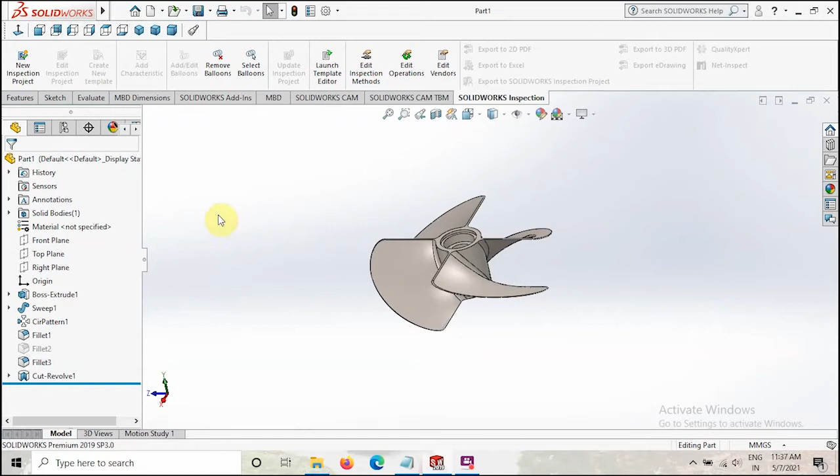I am closing this model now. We will start from fresh. Go to file, take new, take the part, and click OK. After that, go to front plane. We have to create our shaft first.

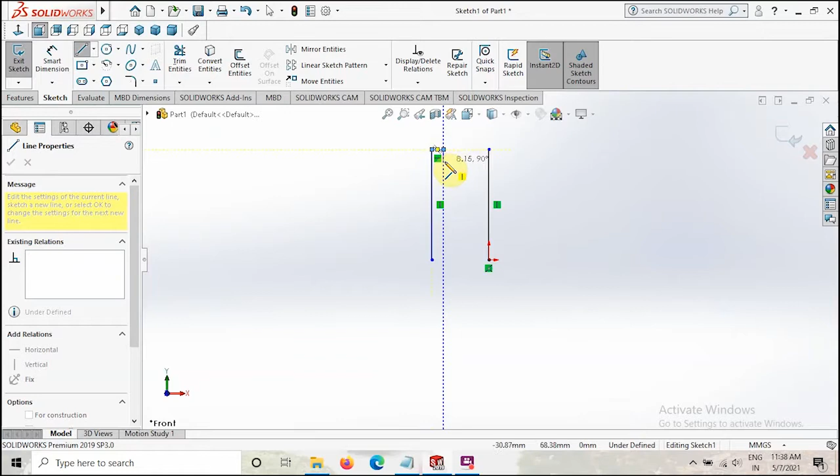Create one center line like this, and create one sketch from here to here. Then draw like what I am doing now: one horizontal line and one vertical line, one more horizontal line and one vertical line, horizontal line, and we'll drop it here.

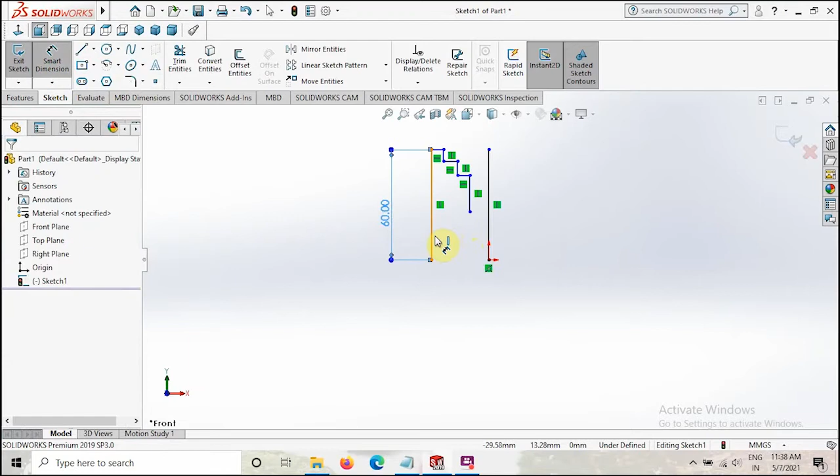Let's give this dimension 50 or 60. Then this dimension we can give 25. This dimension we can give 4. Height we can give 5 or 3.

Then this dimension give around 5, and this height give it around 12. This dimension 12 is given for the bearing sitting area - this place we can place our bearing. After that, give this dimension 3.

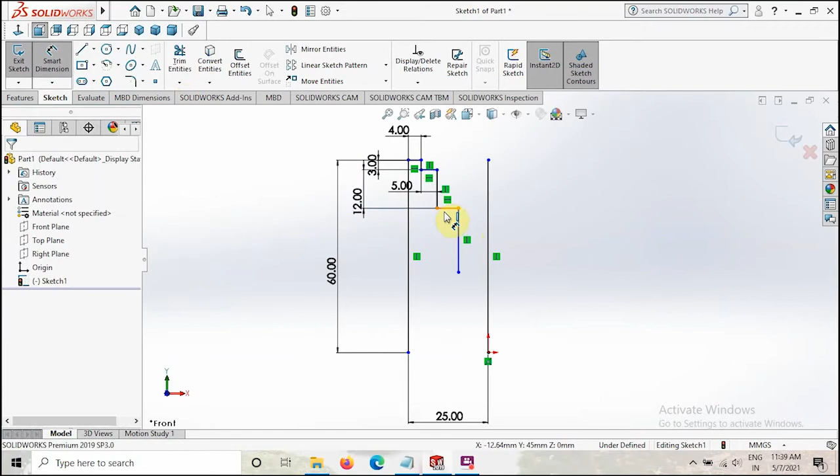We have to mirror this on this line. Just trim this extra line and go to the mirror option, select this sketch, and mirror on this line. After that, click OK.

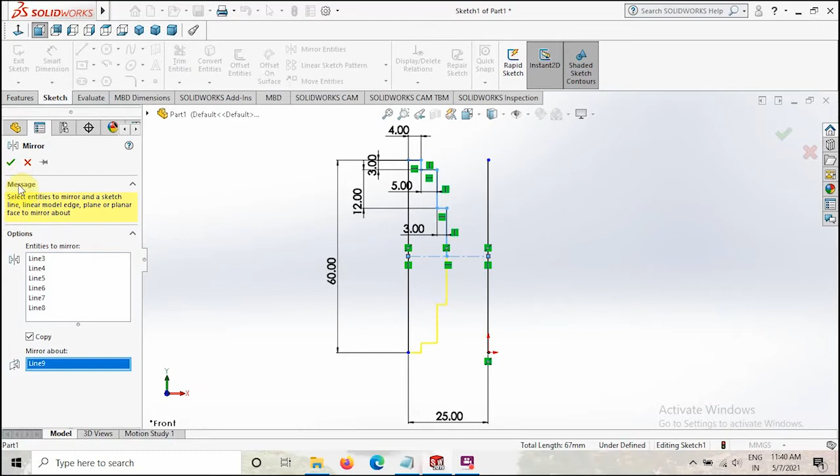Guys, these dimensions are just for modeling purpose. You guys can change it anytime. Whatever dimension you need, you can change it to that dimension. I am going with some assumptions - it's clearly up to you guys how you take it.

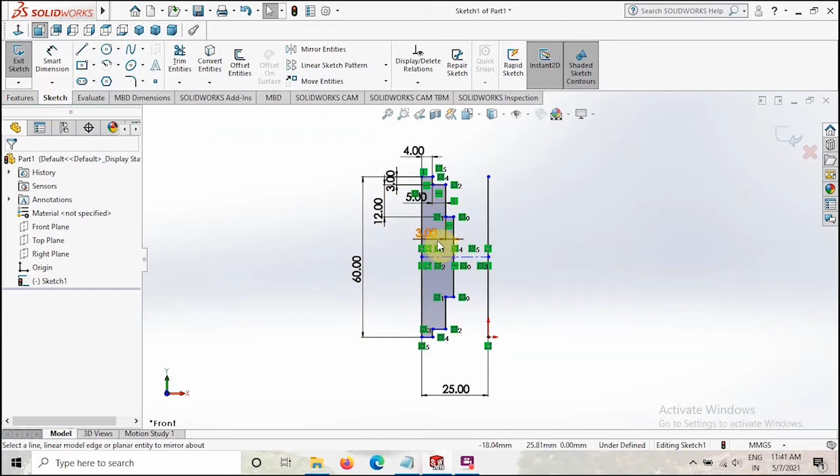After this sketch, just delete this center axis. Then make this center line for construction. Go to features, revolved boss/base, then select the sketch and select the center axis. It's already selected automatically, so no need to worry, just select OK.

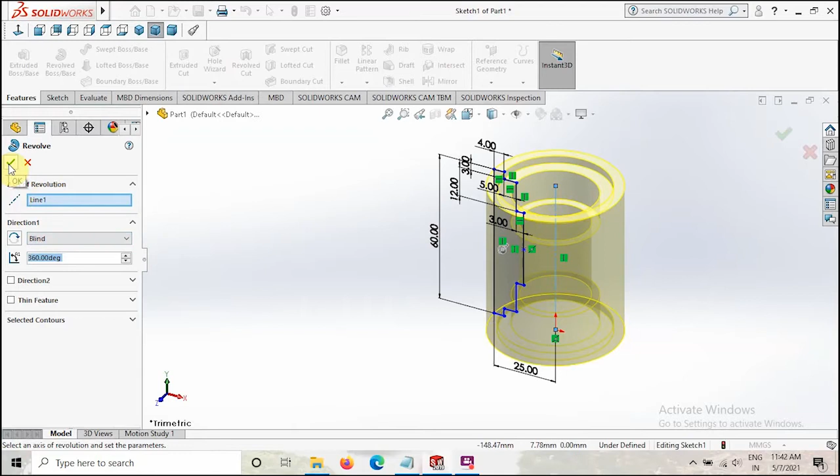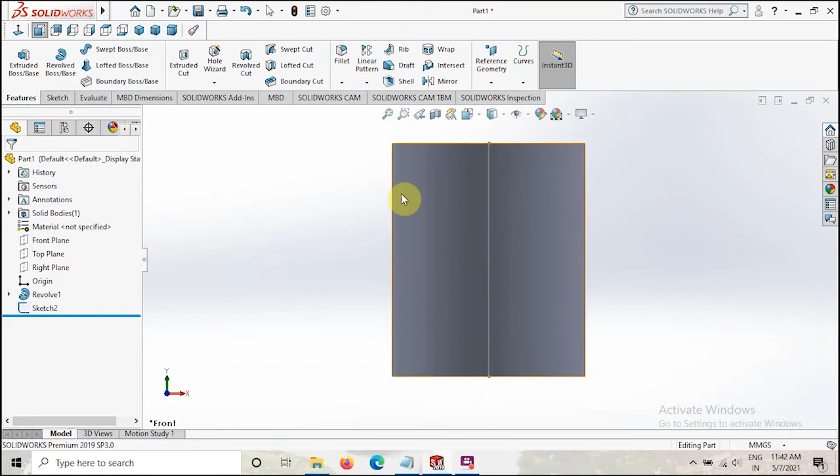After this, go to front plane again, go to normal view, and create one center line like this. Then exit the sketch and go to the top portion of the cylinder or shaft. We have to create a sketch over here, like this. Give this dimension 200.

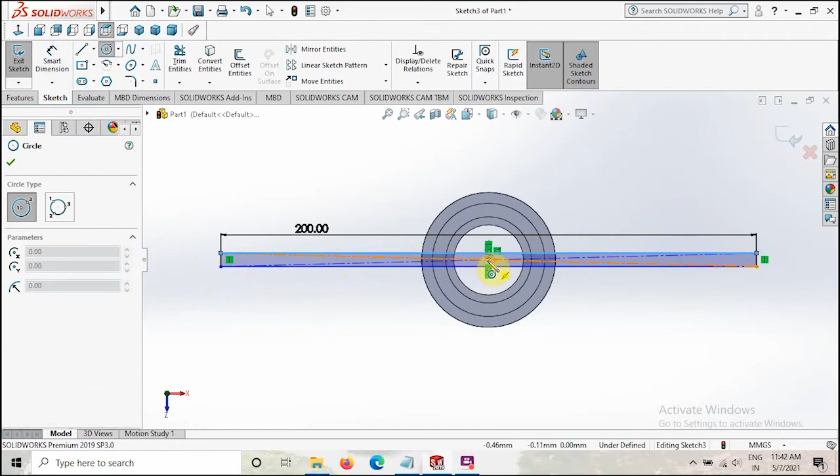And click OK. Before giving the width, create one circle like this. Make it tangent.

Then we have to create one more circle over here. Select this edge and just click convert entities. Now we created 2 circles, and after that just give the width here - what is the width? 2 mm.

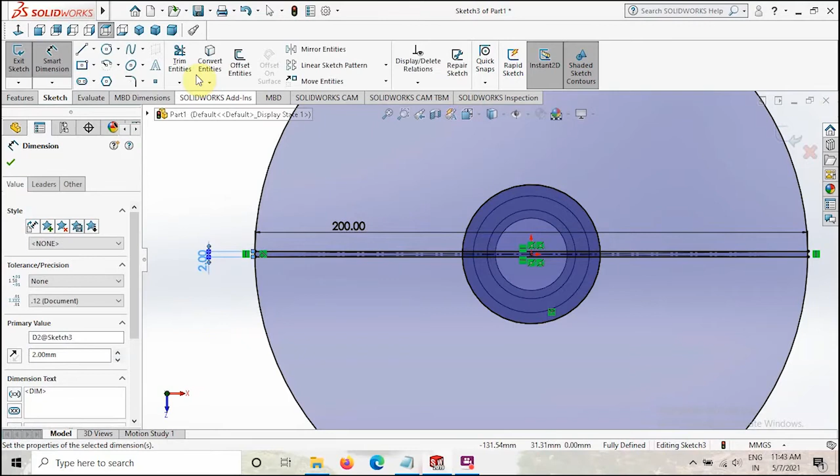After that, trim the extra lines - this one and this circle, and this circle, other side also, this one, and this circle. Delete all the extra lines that are not necessary. Okay, that one is deleted.

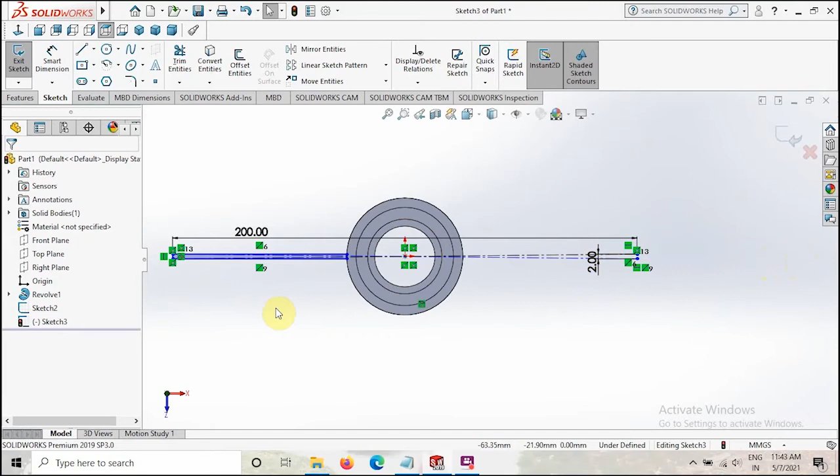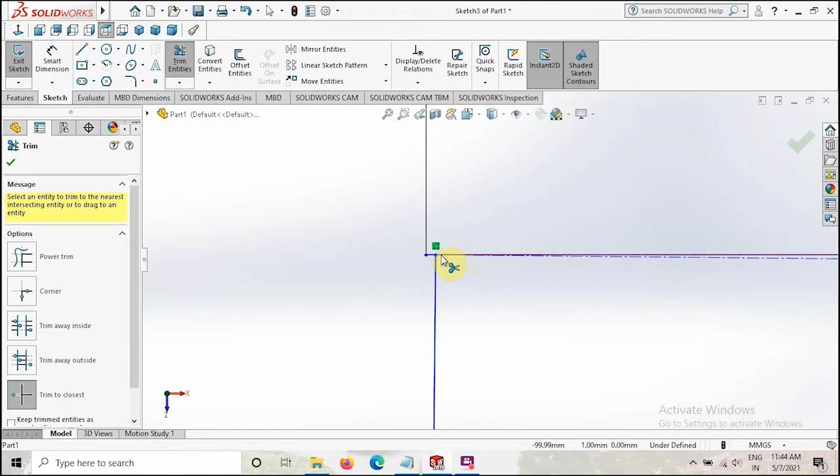So go to this edge and delete this vertical line, not the circle, so that is an edge now for us. After that, just zoom it and trim, and then okay, here one more problem - just extend it guys, and then we can trim it here like this. You should follow the same step on the other side also. Here, okay, it is already coincident, then we can just trim this extra line.

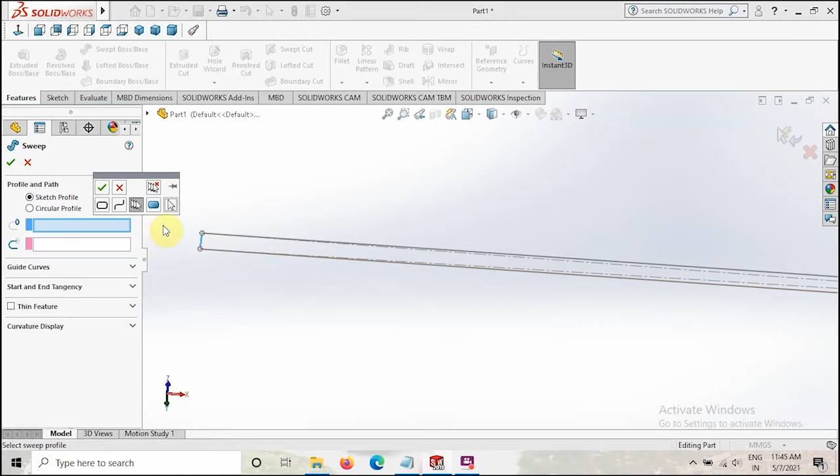After this, just click OK and exit the sketch. Select the swept boss or base, then select the sketch like this, and then select the path.

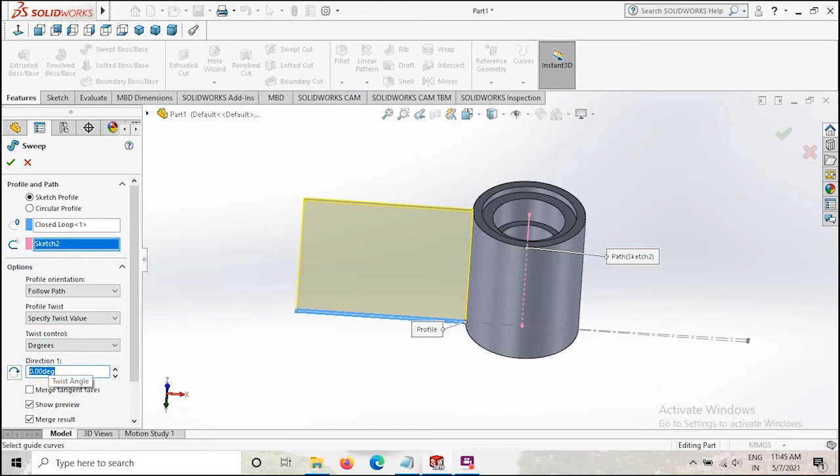After that, go to profile twist, select the specified twist value, then give the direction one as 90 degrees. As you can see guys, we created the blade now.

The next step will be very simple. You can give fillet over here, and here. You can give fillet like this, change the value around 5, and after that you can give fillet

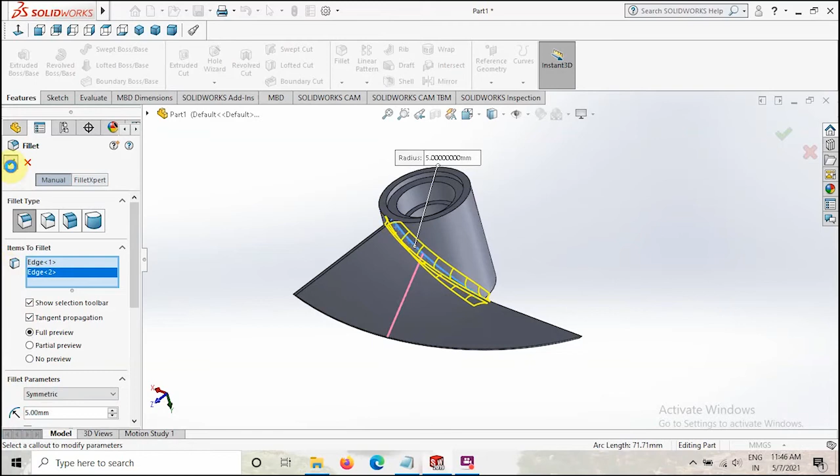over here, and here also you can give. We will give the fillet radius 20 mm, then we will click OK.

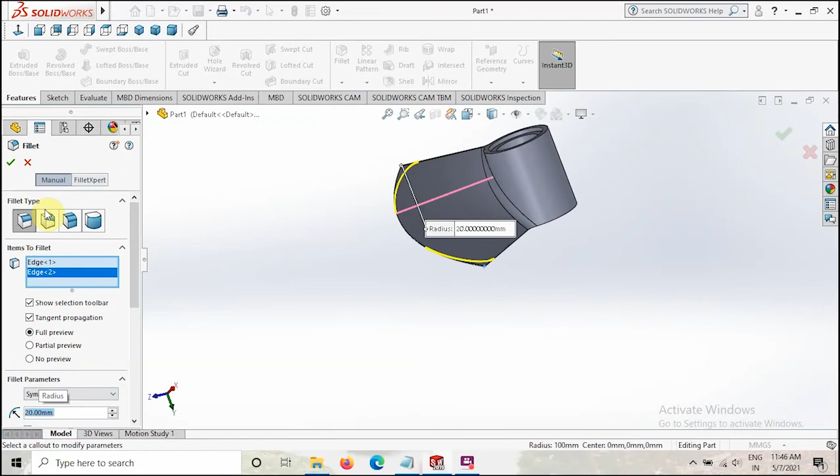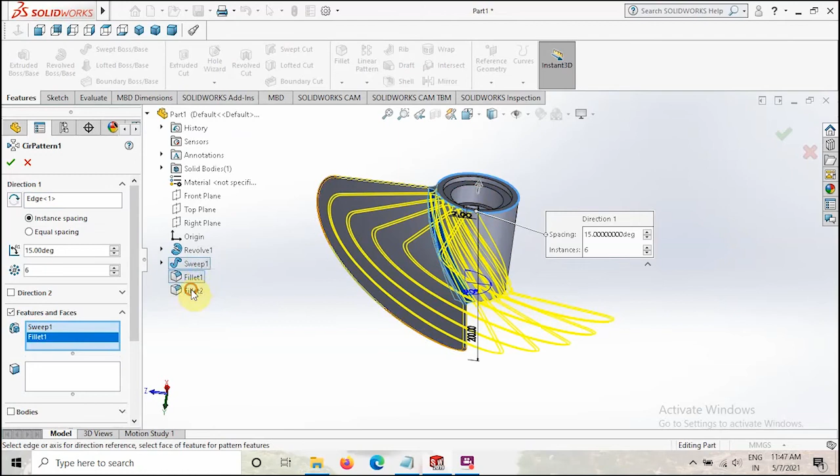After this, we have to pattern the blades around this body, around the shaft. Select the edge and then select the features. You have to select the features like this. Select equal spacing and make the value 4, then click OK.

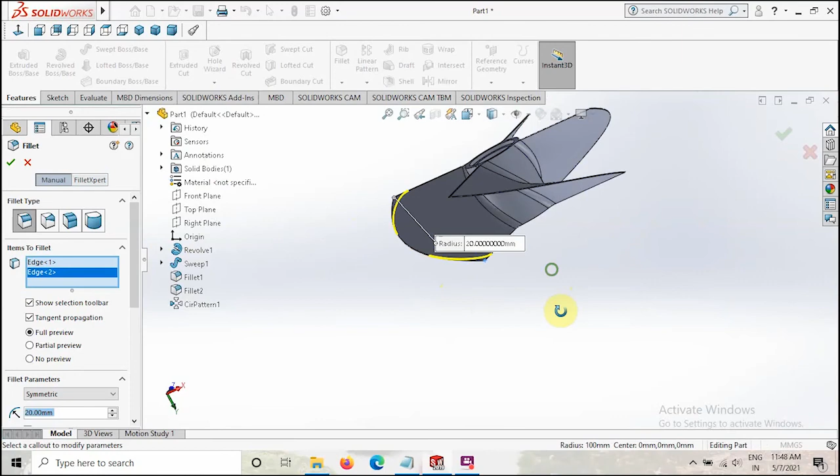I think fillet is not patterned. No issues, you can give it now also. Just select this edge, select the same way on the other side also. Here also you can select it. This side also you can select it.

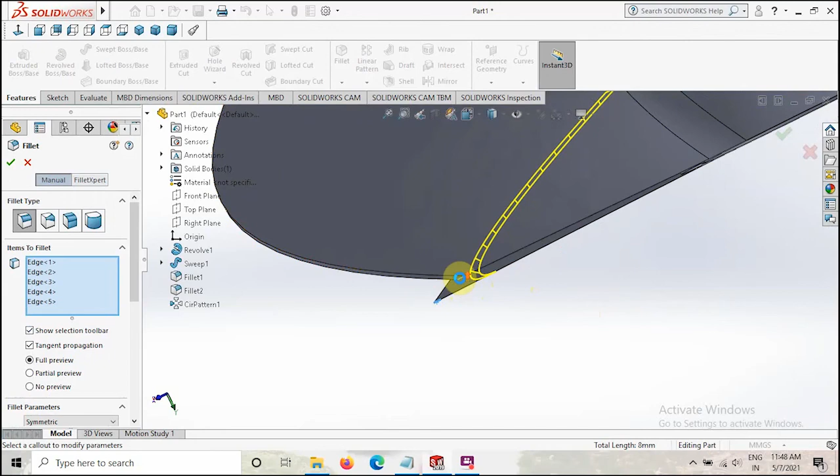And here in this edge, and one edge is remaining, that is this one. As you can see guys, we created the fillets. Now just click OK.

OK. As you can see guys, we created the fan blade.